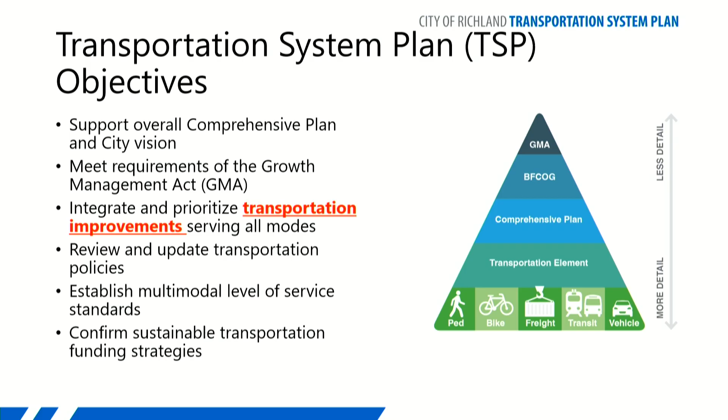So I will pause there for a second if anybody has any questions on the transportation system plan, but if not, I can move forward into the project list. Quick question. Is that a new title? The system, that word? Is that added? There's always transportation plan. So the transportation element is a chapter in the larger comprehensive plan. The transportation system plan is essentially a separate document that gives more detail that supports the transportation element. Okay. So it's essentially a supplemental document that gives you all the meat and potatoes that goes into the transportation element. Thank you.

Okay. So diving into the project development. So I just wanted to give a high-level overview of how we develop the project list, where the projects come from, how we identify what the needs are. So we first start by looking at all the previous transportation planning work that has been done by the city and throughout the region. So we start with the city's 6-year transportation improvement program. Those have already identified a lot of the immediate transportation needs throughout the city, so that is the foundation of our project list. But then we also look at other regional and local transportation plans.

So that includes the previous comprehensive plan, as well as some of the other studies that have been conducted throughout the region, and looking at the recommendations that have come out of those planning efforts. And so here I will mention that we really look to regional agencies and other regional plans to make sure that we've identified and include any of those projects of regional importance within the plan. So that includes the Benton-Franklin Council of Governments Regional Transportation Plan. Projects in that plan that have been identified in the city of Richland are incorporated into our project list. And we also look at project recommendations from the Benton-Franklin Good Road Association, making sure that their recommendations get incorporated into our list as well.

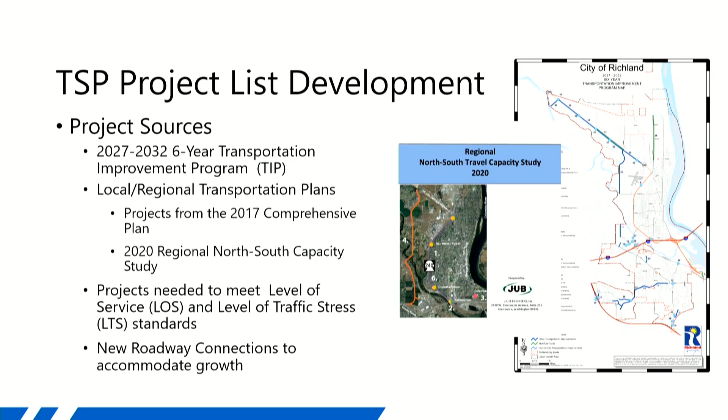So I will pause again here, see if there are any questions on some of the sources that we use to identify the project list. But if not, we can dive into some of the details about level of service, how we come to these different project recommendations that we have. Okay, great. So let's start with the vehicular projects.

So I mentioned level of service standards. So the level of service standard that's set for vehicles is based off of intersection delay. So that's looking at the average delay that a vehicle experiences when traveling through an intersection. That's typically measured on this A through F scale, where A is really no congestion, very little delay when you're going through an intersection, and then F is all the way at the bottom, extensive delay, extensive queuing.

So the city sets their level of service standard at level of service D, right there in the middle. The importance of that is that you're sizing the system to make sure that it can accommodate your peak demands, but also isn't operating with excess capacity throughout the day. If you're planning for level of service A, that essentially means that you're planning for really wide roadways, really big intersections, which are operating way under capacity a lot of the time. So you really want to plan for something in the D or E level, which is consistent with other agencies throughout the state.

Just a quick question on that. Is safety considered at all during the level of service? Is it strictly the waiting time? So the level of service really just focuses on the waiting time. That's not to say that safety isn't considered elsewhere. So as you know, the city has a comprehensive safety action plan. Through that plan, the city has looked at historical crash data to identify what those safety concerns are. And so a lot of those recommendations get pulled into the transportation element in the project list, but it's not specifically looked at here through this level of service standard.

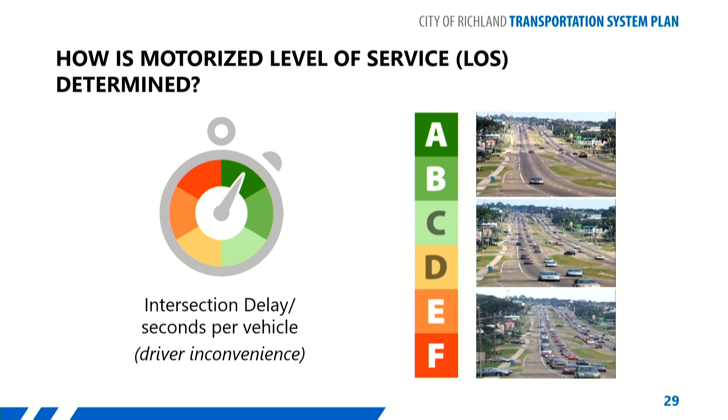Let me back up. I will say that level of service D is applied to signalized intersections and roundabouts. Level of service E is applied to stop-controlled intersections. There are some additional nuances in some of the other level of service standards. I won't get into those tonight. That's a very detailed discussion. So we'll leave it with that.

So these intersections are those that are forecast to operate below the level of service standard and therefore would require improvements as development occurs. So these level of service standards right here are based on their current operation? They don't take into account like the couplet project that's happening in Richland? So these look at future volumes. So this incorporates some of those improvements as well. So it would take that into account. Yes. Okay, thank you.

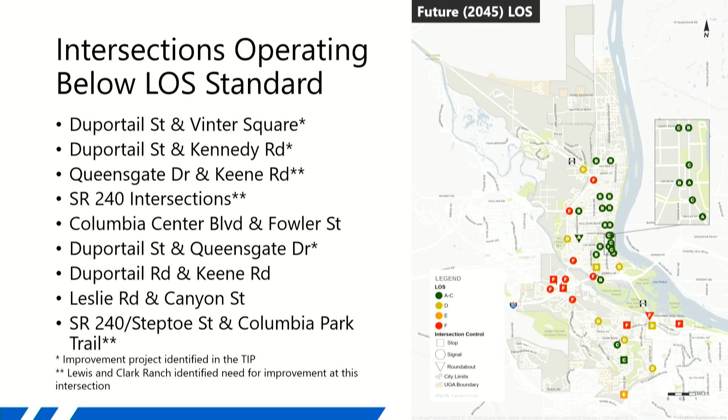Okay. So based off that map that I showed previously, a lot of those areas where you saw the reds, the level of service Fs, are those areas where we've identified improvement projects. And so on this list here, I've identified the high-level improvement types to address some of those issues. So at a lot of those intersections, it's either adding lanes, making changes to signal timing, or at some two-way stop control intersections, adding a new signal or putting in a roundabout to address some of those high side street travel delays.

When we're looking at roadways, some of these corridor segments that are shown with the solid blue lines here, we're looking at some more corridor-wide improvements. So you can see on this list, we have the Downtown Loop project shown, but we also have some roadway extension projects, some roadway improvement projects. We have improvements to Vantage Highway up there to add additional capacity through the corridor as development occurs in the northwest part of the city.

And then the last thing on this map are the dash connections. So those are new road connections. So I talked about that at the top. As development occurs throughout the city, some new roadways are going to be needed to provide connectivity and accessibility for some of these new areas of development. And so you can see a lot of those new roadway connections are located in the Badger Mountain South area and up in Horn Rapids. Those are the areas that are being developed, and so those are the areas where a lot of the new roadway network is going to need to be completed.

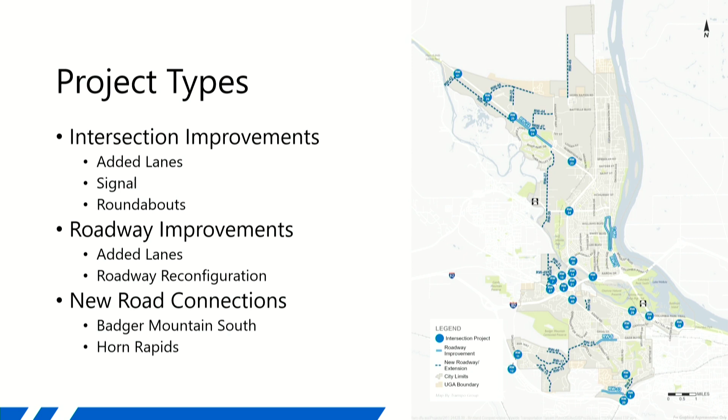As part of this process, we began some of those conversations with WashDOT. They were part of our steering committee that helped us identify and build out this project list. In the future, further discussions will have to be held to nail down exactly what those improvements look like, but this is setting the groundwork to figure out how to best address congestion at those intersections.

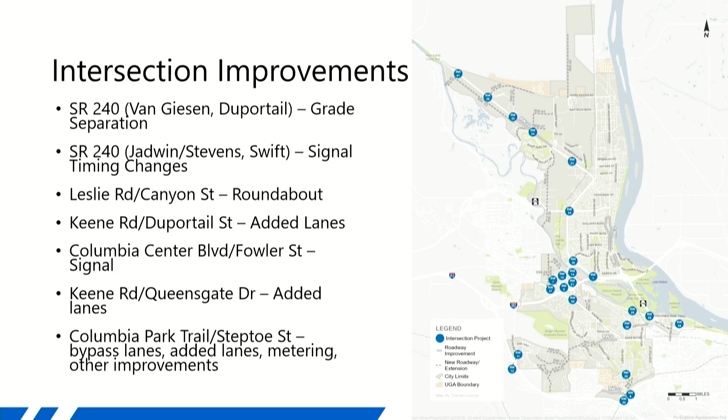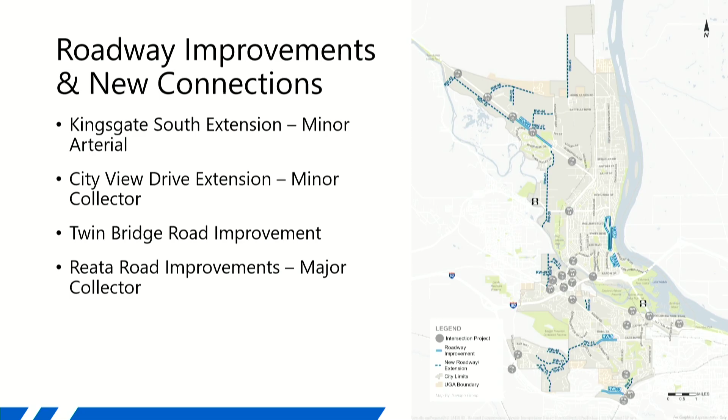Okay, perfect. Getting into active transportation, I'll start walking us through the level of service standards for pedestrians and bicyclists. Like you were talking about, there's a need to look at safety as part of transportation needs going into the future, and the metric we're using to identify pedestrian and bicycle needs gets at that. It's called level of traffic stress, a measure of the level of comfort and safety provided by a pedestrian or bicycle facility.

It really looks at the degree of separation provided between pedestrians and bicyclists and vehicle travel, and what the volume, speed, and roadway size is that the vehicles travel along. And so we've set these standards to really look at identifying not only where a bicycle and pedestrian facility is provided, but also how well it performs on this comfort level scale. Because we want to make sure that the bicycle and pedestrian facilities that are provided within the roadway network are identified and constructed to match the roadway context on which they're provided.

So in order to do so, the first step of this process was to identify a pedestrian network where we want to provide pedestrian facilities. As part of this, we identified a network that's made up of primary and secondary roadways. The primary network is really the backbone of the system. It's connecting major destinations throughout the city and is meant to provide the most comfortable routes. The secondary network is more supportive of the primary network. It's providing connections between parts of the primary network, oftentimes on less direct routes or areas where walking is a

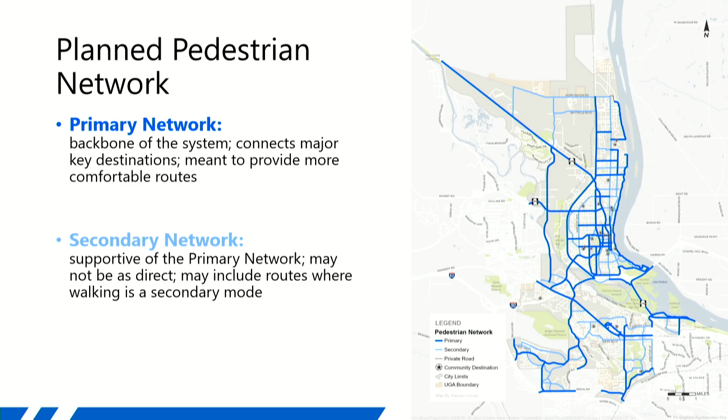And so I will move forward and show how the level of traffic stress got evaluated for this network. Based off of the level of traffic stress matrices, we assign... I skipped over that on the previous slide. Let me go back. So level of traffic stress is measured on a 1 through 4 scale. It's similar to the A through F scale that I discussed for the vehicles, where level of traffic stress 1 is comfortable for users of all ages and all abilities. That's essentially your best score. Level of traffic stress 4 is on the other end, where it's really only used by the most confident riders or people who have no other choice. So the goal here is often to provide level of traffic stress 1, 2, or 3. Those indicate areas where users with a greater range of abilities are able to use those facilities and would be comfortable using them.

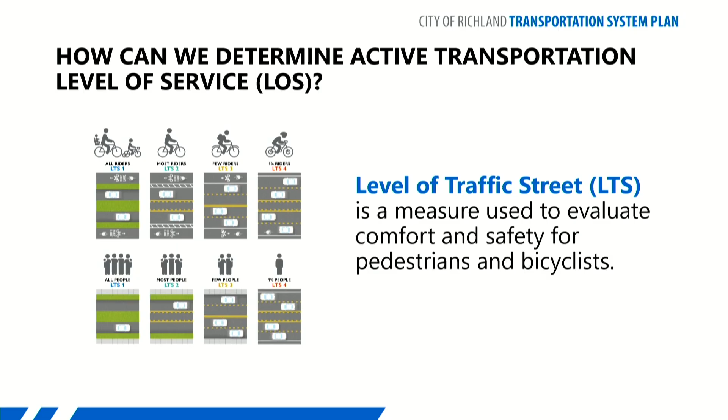Raising my hand, sorry. Hi. Question: I understand that this is pedestrians and bicycles, but what provides an LTS of 1 for a pedestrian might be an LTS of 3 for a cyclist. How do you differentiate between the two or consider that for planning? Yeah, that's a great question. We actually have two different scoring metrics for them. What we're looking at right now is just pedestrians. Oh, okay. Thank you. You will see that a lot of what's out there today scores pretty decently for pedestrians. Once we get into bicycles, it goes down a bit more, so a lot more roadways are level of traffic stress 3 and 4 currently. But we can get to that in a bit.

And so the way we've set our level of traffic stress standards for pedestrians is based off of the two different network priorities that we've identified. So for the primary network, we're trying to achieve a level of traffic stress 1 or 2, really because the primary network is where we want to provide those more comfortable facilities. For our secondary network, the one that's supportive of that primary network, we're saying that a level of traffic stress 1, 2, or 3 is acceptable. So really anything that's LTS 4 is only what needs to be improved.

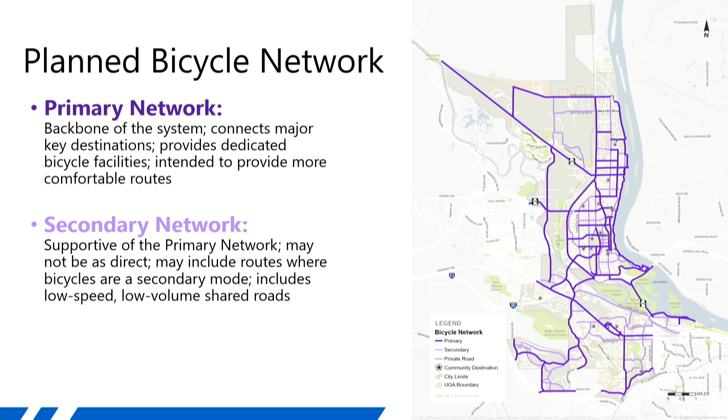Hi, Mike Rosatell can't be here, but he did have a question about the pedestrian network. Yeah, absolutely. He asked if we had a linear footage or percentage of the transportation system in town that lacks pedestrian infrastructure. Yes, absolutely. Great question. Thank you. So yes, we looked at the network. Only about 20% of the city's pedestrian network does not include pedestrian facilities currently. And even of that 20%, about 7% of it is on local streets.

So local streets oftentimes do not require sidewalks because, like I mentioned, lower speed, lower volumes. You can share the road with both vehicles and pedestrians, not have quite as big of a safety concern. And so, yeah, a lot of the pedestrian network within the city is already pretty well built out. Great, thank you. Thank you for that question.

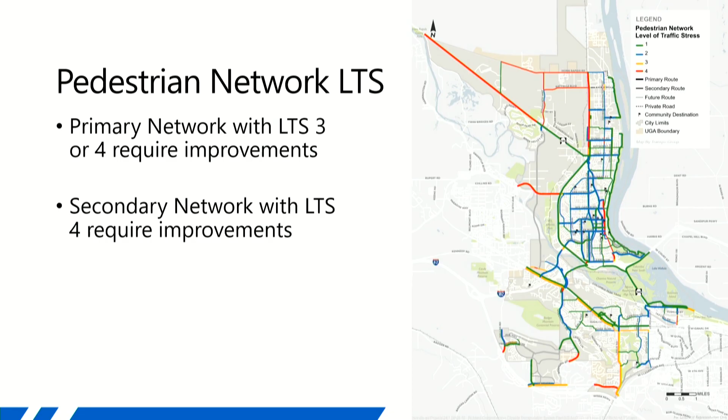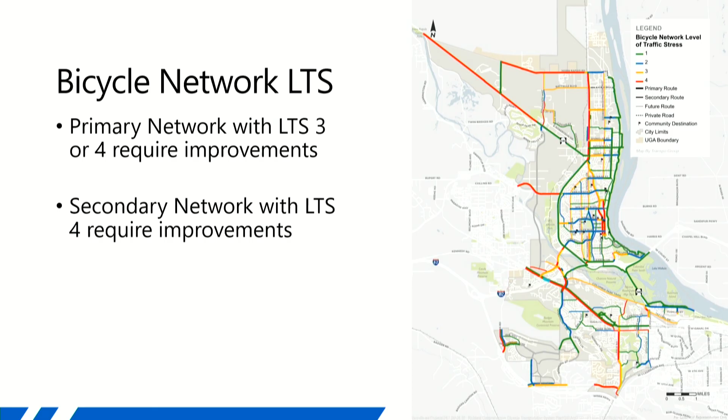Okay, yeah, so for the bicycle network level of traffic stress, like I was saying, a lot more of the city is at level of traffic stress 3 or 4. So how that translates into the project list is that a lot of our projects are trying to improve the level of traffic stress for a lot more of these bicycle facilities, making sure that there's a lot more continuous connections of level of traffic stress 1 and 2 on the primary network. So the standards that we're setting for the bicycle level of traffic stress are the same as for pedestrians. Primary network, we're trying to achieve level of traffic stress 1 or 2. And then for the secondary network, level of traffic stress 1, 2, or 3 is acceptable.

So the non-infrastructure projects can include reducing speed limits or providing alternative connections, say provide a parallel route where you can't achieve the desired level of traffic stress because the speed and volume on a particular roadway is too high. And then on the infrastructure side, we're looking at sort of your range of pedestrian and bicycle facilities. So for pedestrians, that's typically either a multi-use path or a sidewalk.

For a sidewalk, we look at different types of separation from the vehicle travel lanes, whether that's providing a landscape buffer, providing a parking buffer, something like that, to provide a little bit of additional separation between the pedestrians and the vehicles. For the bicycle network, we're looking at different types of bicycle facilities. So that's bicycle lanes and different types of separation of that bicycle lane from the vehicle traffic. So that can include just a painted buffer on the side of the road. That would be something like is along Swift right now today.